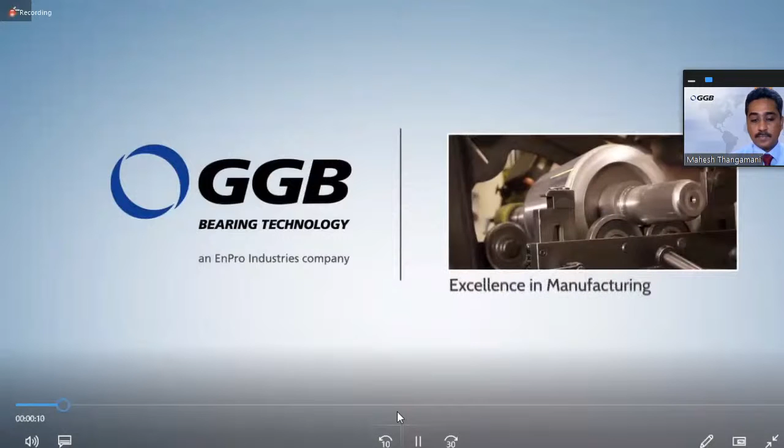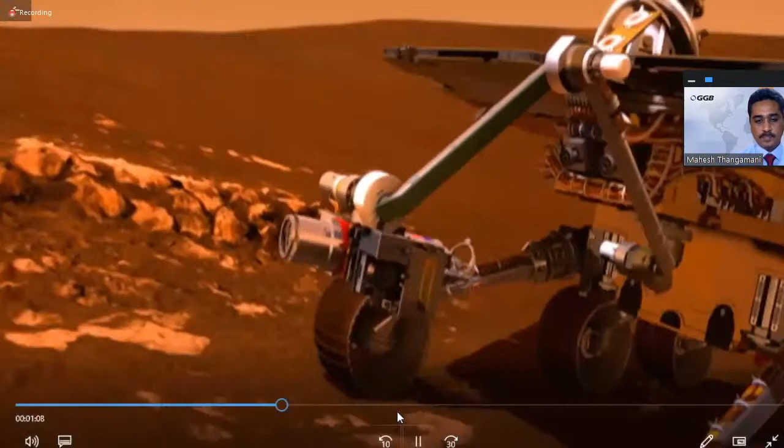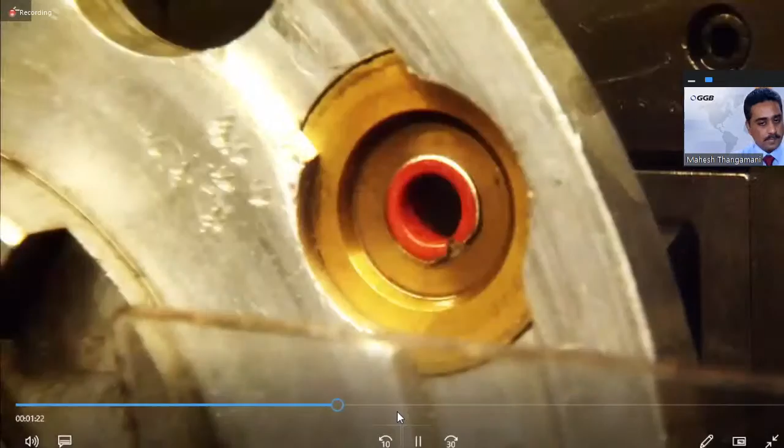GGB Bearing Technology is the global leader in high-performance bearing solutions. GGB means excellence in manufacturing, reliability in performance, and innovative bearing solutions and ideas, ideas that solve our customers' most challenging problems. GGB is a team of over 1,100 dedicated, results-oriented employees. You'll find them in factories, labs, offices, and research facilities around the world, all driven by the same shared values: safety, excellence, and respect. We collaborate with 30,000 customers in virtually every nation of the world across a wide range of industries. Our solutions are found in automotive, aerospace, agriculture, construction, renewable energy, industrial, foundries, high-performance recreational equipment, and fluid power applications. GGB high-performance solutions are even helping NASA explore the surface of Mars. GGB's success is built upon decades of innovation in low-friction, self-lubricating, and pre-lubricated plain bearing technology. Our manufacturing processes make it possible to create solutions that maintain the tightest tolerances and production volumes our world-class customers expect.

From customized bearing solutions for critical applications to thousands of standardized bearings per day, all to provide our world-class customers the highest levels of manufacturing excellence and customer service responsiveness. GGB achieves all of this while upholding the world's highest standards for quality, safety, and environmental stewardship.

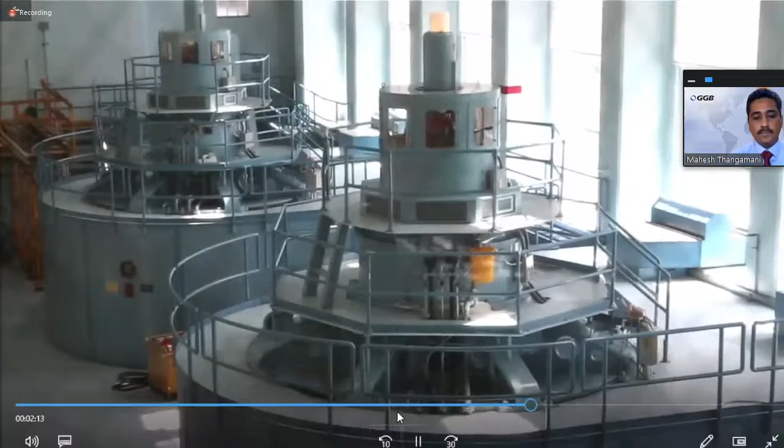The result is a diverse portfolio of precision-engineered bearing solutions. GGB innovative solutions make things lighter, quieter, more compact, and more resistant to the forces of friction. We add durability and reliability, improve mechanical efficiency, and lower long-term maintenance. GGB bearings minimize the threat of corrosion and alleviate the need for constant lubrication.

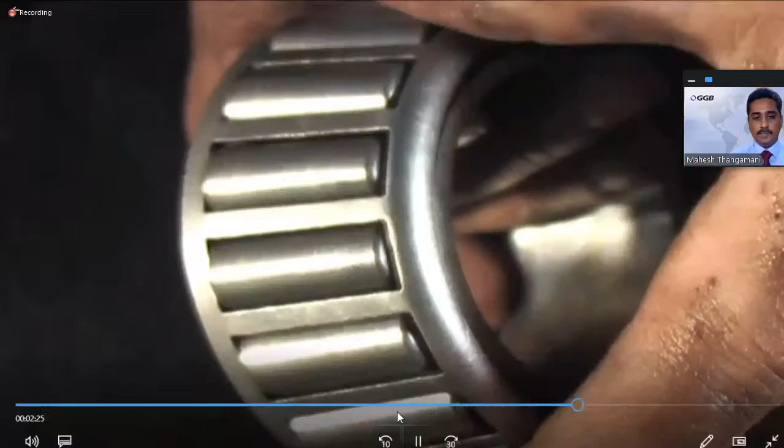These are the things we are achieving. These are the things our customers have come to expect. GGB will continue its commitment to innovation and to the values that define who we are.

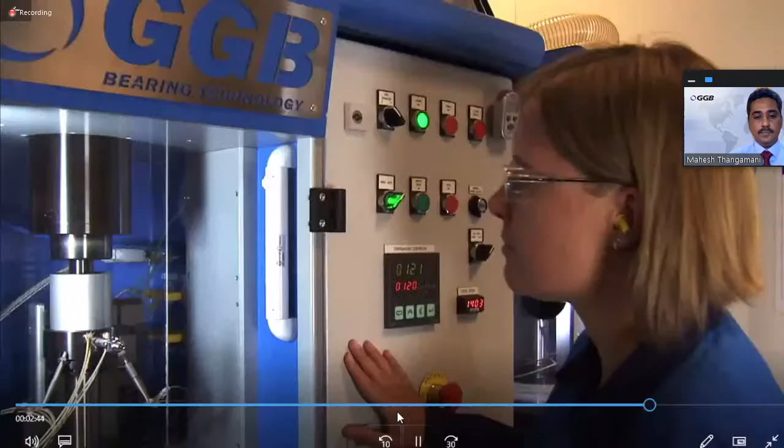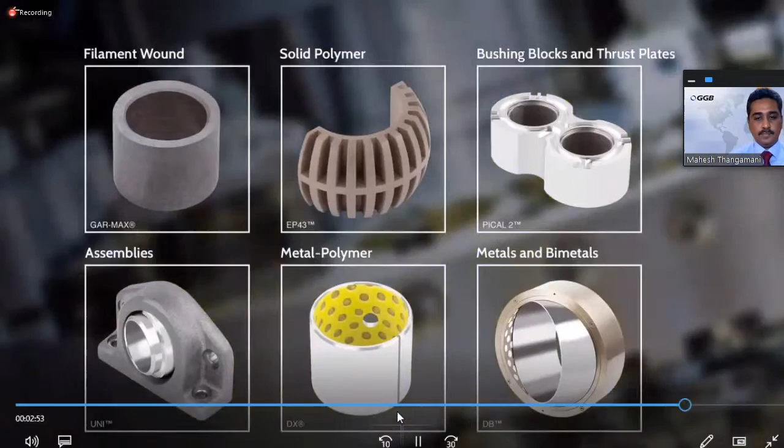We will continue to advance the science of tribology with bearings that set new standards for low friction, lightweight, low maintenance, high performance, and environmental responsibility. Our dedication to success is reflected in our passion for people and a continued focus on our customers and their success. That's the spirit that defines GGB, the leaders in high-performance bearing technology.

Okay, now you are able to see the presentation screen? Yeah. Sorry for the glitch.

Now, talking about GGB product portfolio, metal polymer is the first and most important product portfolio. GGB is the inventor of metal polymer technology, the brand DU, patented technology of GGB. This is the first ever self-lubricating bearing invented, DU.

And then subsequently, we have engineered plastics in our portfolio, homogeneous polymers of different compositions suiting different application conditions. And bimetals is a legacy product. And one more product portfolio, fiber reinforced composites.

This is again an invention from GGB, made from glass fiber backing and polymer sliding layers. And then we have sub-assemblies. And the newest introduction to us is coatings.

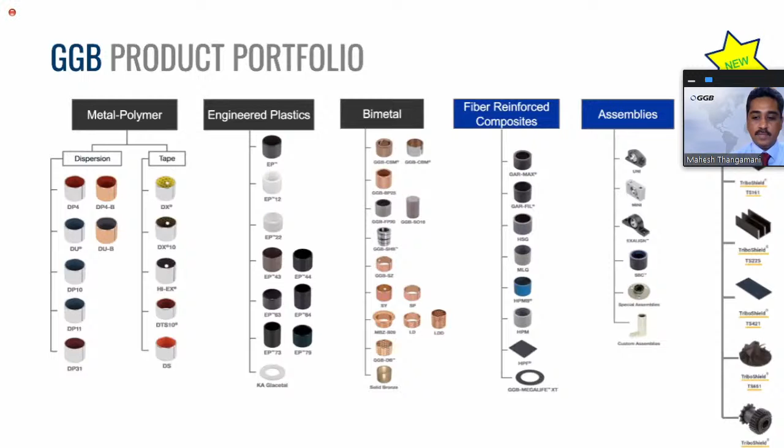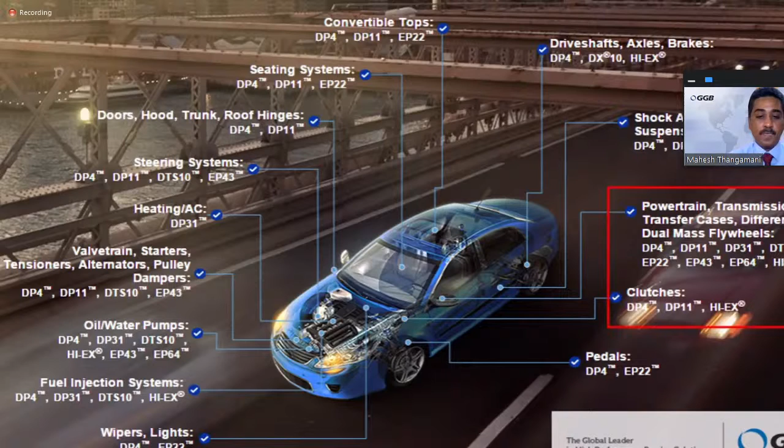Now, let's talk about the transmission industry trends. With more and more traffic situations and more use of personalized transportation, people want to move from manual to automatic. So in future, we can expect more automatic transmissions being used.

And even in manual transmission, with the traffic conditions in place, people want effortless, smooth shifting for transmissions. And on the industry side, there is more and more push to reduce cost because of increasing material cost. People want to reduce the cost of transmission, and government norms like CAFE standards expect the average fuel efficiency of every manufacturer to improve.

And on the other side, there is a team working towards developing compact, lightweight transmissions which meet with electric drives and wheel drives, which will again be a future technology. So let's see how we can work on this.

Let's talk a little about shifting, which is a major important function in manual transmission. Effortless shifting can make the passenger happy and make the ride an enjoyable one. If the shifting is not smooth, the effort is higher, or it is not comfortable, then this leads to passenger discomfort.

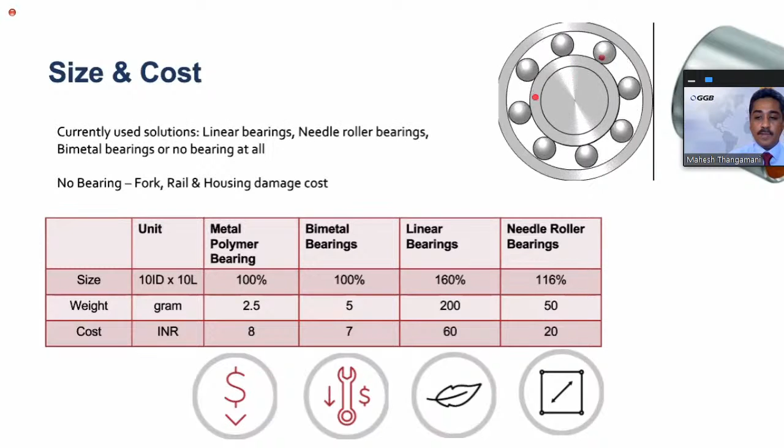Talking about the new norms, with increasing restrictions or constraints to bring in more fuel efficiency, transmission manufacturers are now forced to use low viscous oils in the transmission. This can lead to some performance reductions in certain applications, certain components. Our metal polymer bearings are compatible with low viscous oils, and can work in high temperature as well without any problem.

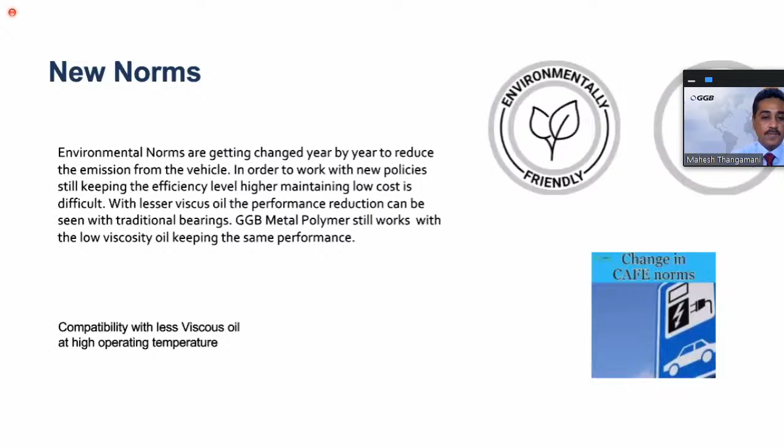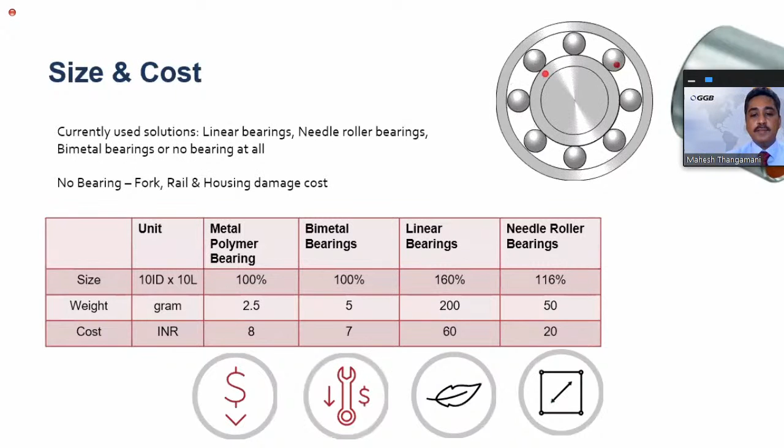Now comparing with the functionality, how a metal polymer bearing works in comparison with any other metallic bearings, how it can perform better. In metal bearings, because of slow speed applications in transmission, there is oscillation or sliding movement, not very high speed. Many cases work in boundary layer condition - there is no fluid film formation between this working condition, or most cases it works dry. So there is metal and metal contact between the bearing and shaft layer, and this leads to higher friction and wear rates.

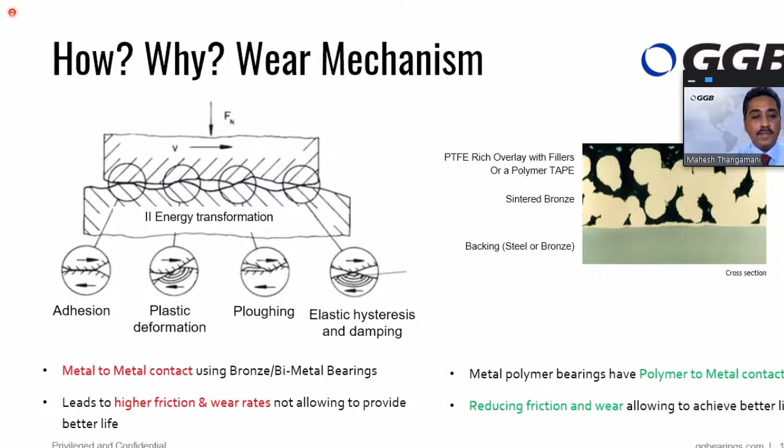In case of metal polymer bearings, let's see the structure first. You will have a steel backing or bronze backing, and then an intermediate porous bronze layer. The sliding layer here is a tape or polymer layer. With this polymer layer, you will have a contact between steel and polymer lining, and this has lower friction, and will reduce wear and stick slip also. So this will give you better life in comparison with any metal and metal contact situation.

Let's get into some details of applications where our bearings are used in transmissions. Abhishek will provide some details of this. Abhishek, please. Yeah, thank you, Mahesh.

So I'll go through some of the applications. As you can see, these are the applications in the transmission area where GGB bearings can be used, which will improve the tribological performance and have a cost reduction with respect to roller bearings. So we have taken a few applications in the subsequent slides. Not all applications are explained because of time constraint.

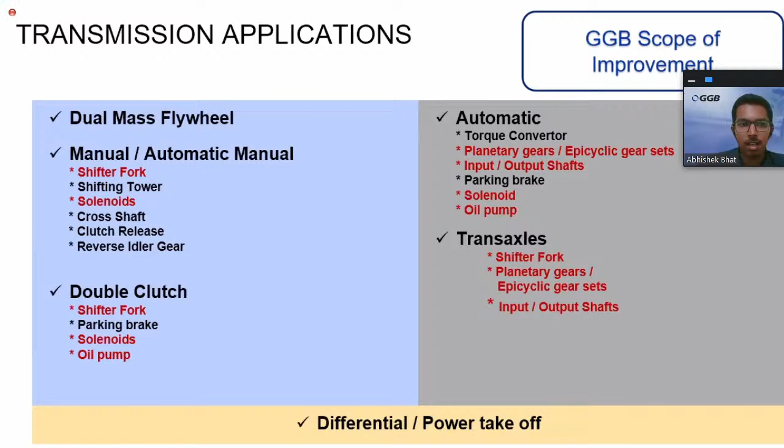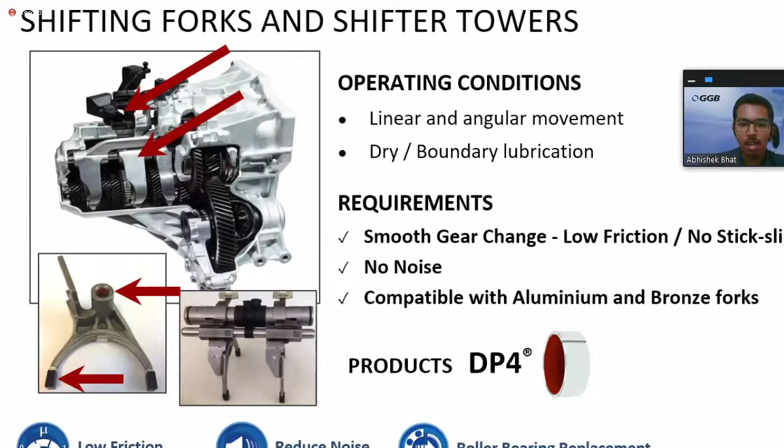So next, we'll have the first application, that is shifter forks and shifter towers. The operating condition here will be dry and boundary lubrication, having linear or angular movement. So the requirement will demand smooth, low friction, zero stick slip operation, and should be quieter. So we have DP4 bearings from our product portfolio that will give better performance. Traditionally, hardened shafts are used, having good surface finish, but it will have stick slip issues, higher friction, and eventually lead to housing damages. So with the help of DP4 bearings, which is a proven solution, we can avoid these issues.

So the next one is the clutch release forks. The bearings will be subjected to very heavy loads around 33-35 MPa, and will have heavy shock loads. There will be also a space constraint. So we have advantage over roller bearings that it will be compact in size and quieter in operation because there is no rolling element here, just one bush. Most metal polymer bushes are compatible with aluminum housing. So our DP11 bearing will fulfill all the application requirements and have customer satisfaction.

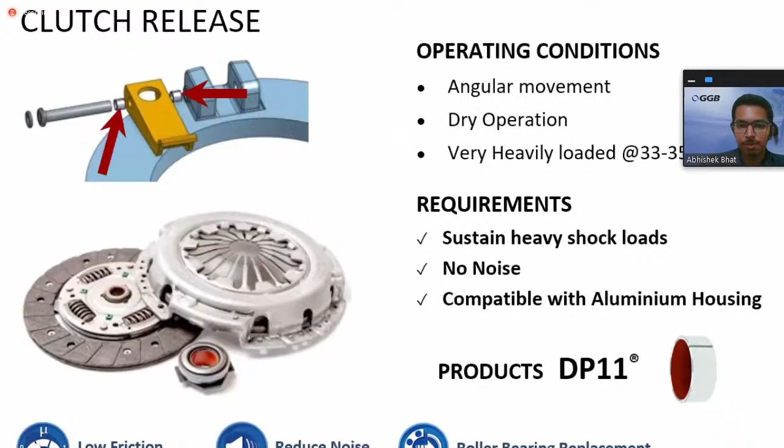So the next one is the reverse idler gear. The application requirement will be to have low wear, low friction in order to reduce heat generation. As I said before, our bushes will be compact in size with respect to roller bearings. In order to solve the issues of wearing, we have metal polymer solutions or EP solutions, that is polymer bushes, which will work better in this application with marginal lubrication or complete oil lubricated conditions.

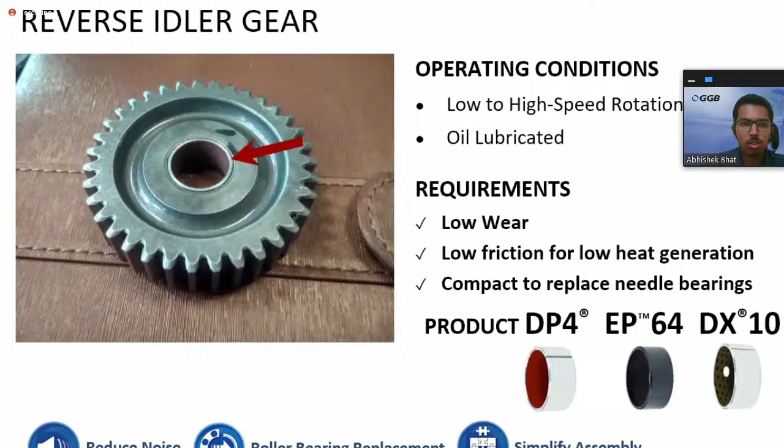So the next is differentials. This is one area where there will be heavy oil contamination, and we need to have resistance to the contamination compared to metal washers. So we can have DP4 or DX10 washers here, which will give better performance than traditional metal washers.

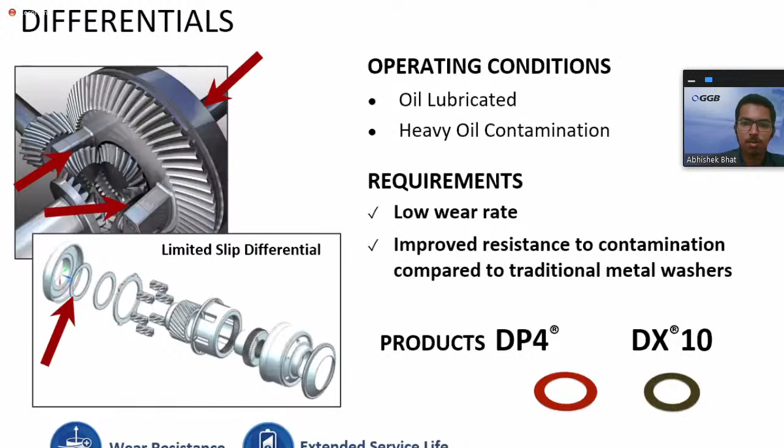So the next one is the cross shaft. The operating conditions will be dry or grease lubricated, having angular movement, and usually they will use 2 to 4 roller bearings per system, which is too costly. So with the help of metal polymer bushes, we can have low friction, zero stick slip, and very less noise. And it is compatible with aluminum housing. So we will have a cost advantage in this application.

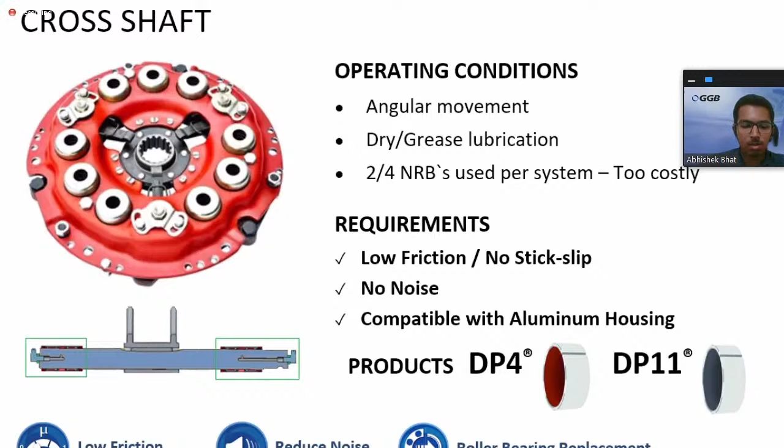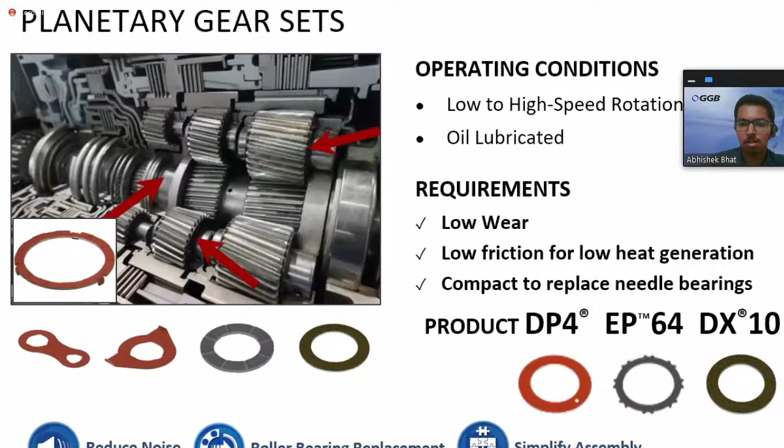So the next one is, okay. It's not possible to cover all the applications because of time constraints. We've shown an overview of where GGB bushes can be used, with potential to replace roller bearings and traditional bronze bushes, giving better performance and significant cost reduction. For specific application development discussions, you can contact our sales executives.